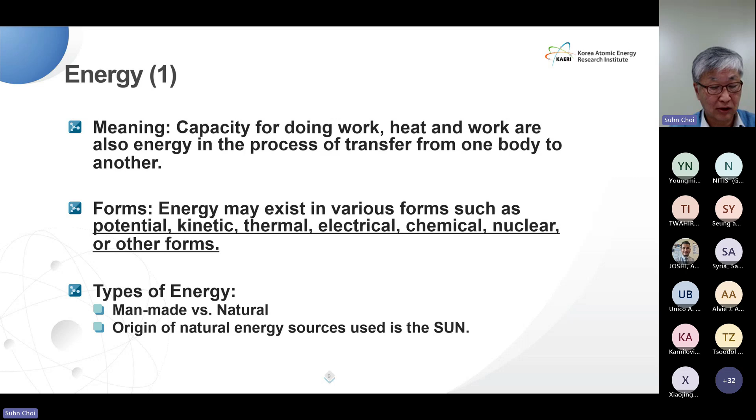Here's a concise breakdown of several energy sources: fossil energy, renewable energy, and nuclear energy. Each energy source has its unique characteristic and impact, and understanding this distinction is crucial for making informed decisions about sustainable energy use.

In recent time, various regions across the globe have been experiencing more frequent and severe weather events and natural disasters. The consensus among experts and specialists is that this surge in abnormality can be attributed to the excessive emission of greenhouse gases from the burning of fossil fuel. To overcome these challenges and ensure our survival, it has become imperative to transition towards sustainable and clean energy solutions.

Thus, we need sustainable clean energy to jump up the greenhouse gas hurdle. This slide underscores a critical point. The primary driver of climate change is closely tied to energy-related activities. A substantial 73.2% of greenhouse gas emission as of 2016 originated from the energy sector. This includes a broad spectrum of activity like power production, heat utilization, and transportation.

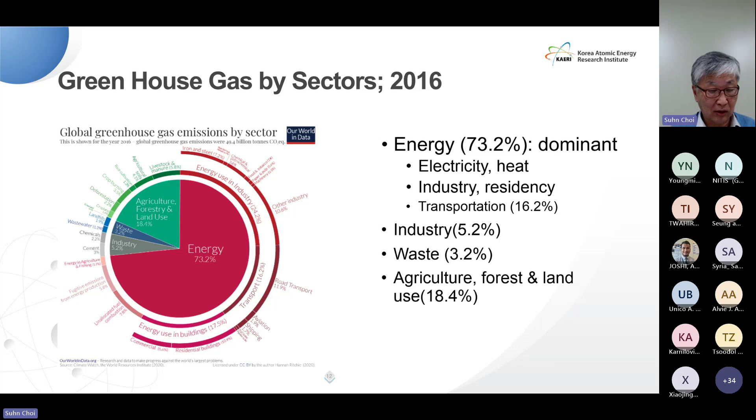Germany's energy mix provides valuable insight into the challenges associated with transitioning to renewable energy source. It emphasizes how Germany still relies significantly on non-renewable sources despite emphasized renewable energy. The combined proportion of gas, coal, and lignite exceeds that of renewable energy, standing at 45% compared to 44%.

This reliance on non-renewable sources is partly due to the intermittency of renewable energy. To compensate for the fluctuation of renewable energy production, backup sources like a coal plant are necessary for the consistent and reliable energy supply.

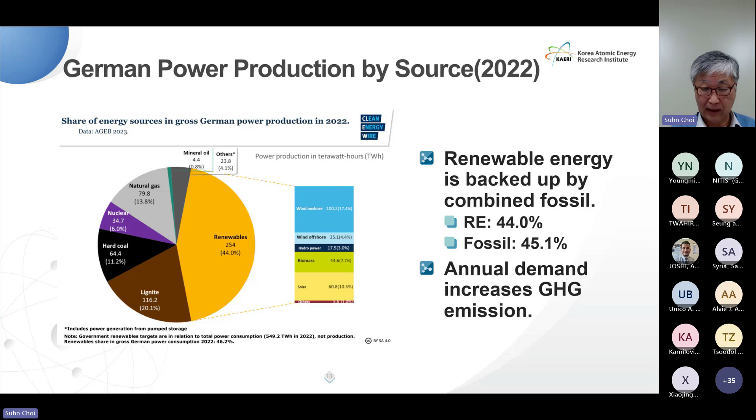Now let's see the characteristic of nuclear power and the classification of reactors. Understanding these characteristics and classification is essential for comprehending the diverse application and consideration in the fields of nuclear technology.

As you already know, there are two reactions to generate nuclear energy. Those are fission and fusion. Fission is an atom splitting phenomena, while fusion is an atom combining phenomena. Both produce amount of energy by E equals mc squared.

Nuclear fusion use lighter elements such as hydrogen and helium, which are in general more fusible, while the heavier elements such as uranium, thorium, and plutonium are more fissionable.

Let's delve into the unique characteristic of nuclear energy, considering both the positive aspect and the challenges it presents. While nuclear energy offers certain advantages in terms of low greenhouse gas emission and high energy density, addressing challenges related to radioactive waste, safety, economic viability, and proliferation risk is crucial for the sustainable and responsible use of nuclear power.

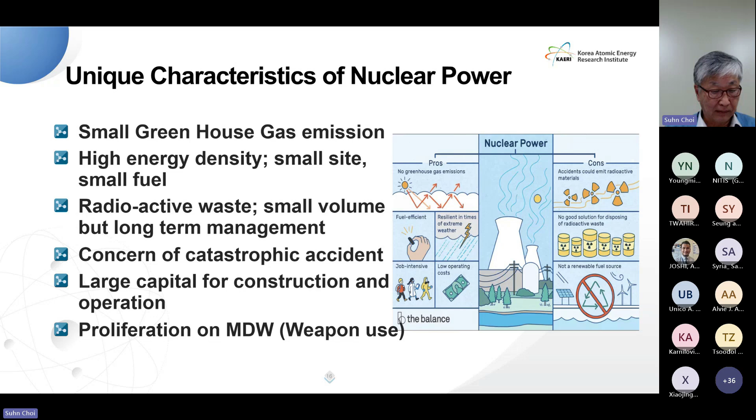Let's look at the characteristics some more. Absolutely, the high energy density of nuclear fuel is indeed incomparable to many other sources, making it a standout feature of nuclear energy. The energy ratio is a million times higher than the chemical reactions such as burning fossil fuels.

While the high energy density of nuclear fuel brings many advantages, it's important to manage the associated challenges, such as the safe handling and disposal of radioactive waste to ensure the overall sustainability and responsible use of nuclear energy.

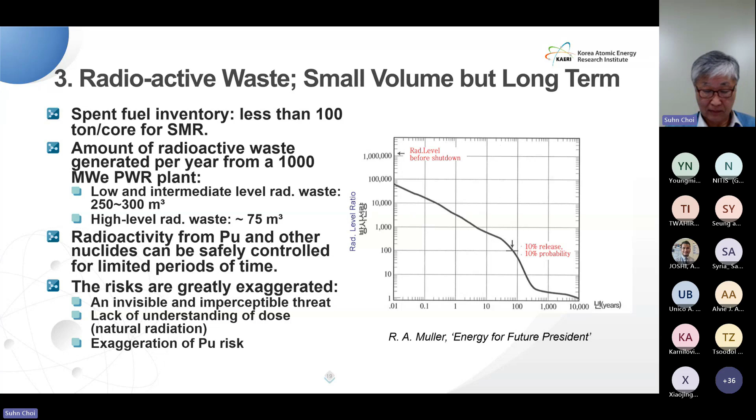According to Wiki, over the past 50 years, there have been 10 accidents rated at INES level 4 or higher, showcasing the relatively low frequency of serious nuclear incidents. In the 70 years since the development of nuclear power, the reported number of direct deaths due to nuclear accidents is less than 70 people. This emphasizes the effectiveness of safety measures and continuous efforts to improve reactor design.

The number of deaths from hazardous chemicals is highlighted as surpassing the number from nuclear accidents. While acknowledging that nuclear power plants are not risk-free, the statement emphasizes that they are not more dangerous than other accidents inherent to civilization.

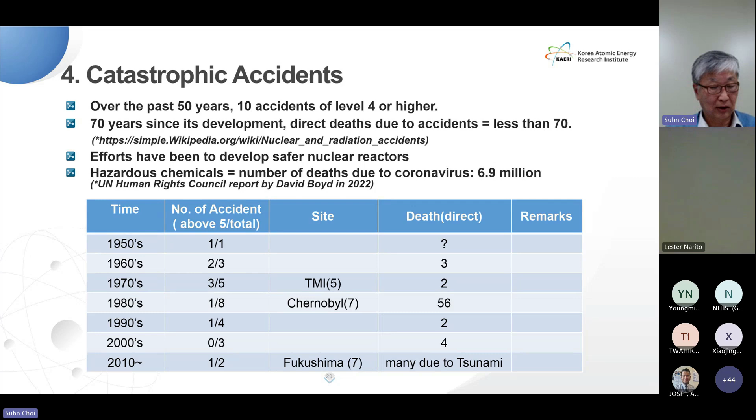A recent and substantial challenge in deploying large nuclear power plants appears to be of economic nature. Examining the table, the LCOE, levelized cost of electricity, for nuclear power is around $70 per megawatt hour, seemingly competitive with any other energy source, particularly renewables. However, the perception of nuclear power being expensive arises from the substantial total construction cost, a significant investment with a prolonged construction period of 7 to 10 years, inclusive of licensing permits.

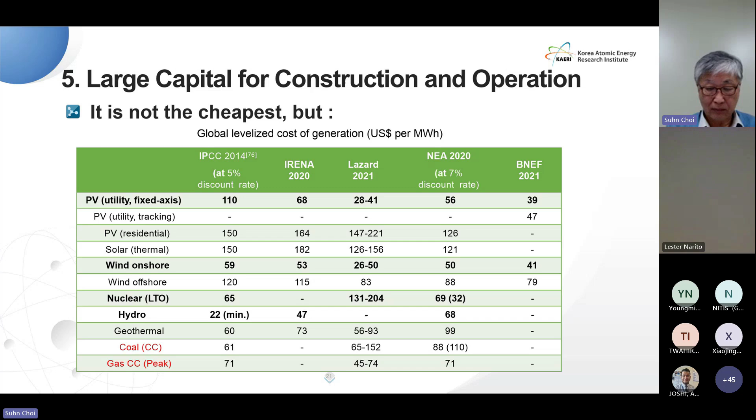Westinghouse's Vogtle power plant has had its construction period extended by 5 years, with the construction cost more than doubling. Framatome's Olkiluoto is showing a more than threefold increase in construction cost and a 13-year construction period extension.

However, this is not necessarily the case. The construction period and construction cost for the Barakah nuclear power plant, exported to the United Arab Emirates by KEPCO Korea, were the same as planned.

Since this uncertainty is large due to the large scale of business, the concept of SMR, a Gen 4 nuclear reactor, is being proposed as a way to utilize nuclear energy while avoiding this issue. However, the implementation of SMR is still in the developmental stage, necessitating verification through construction and operation.

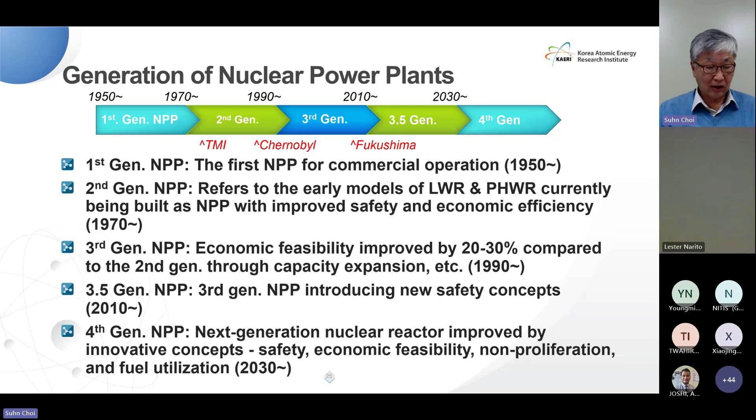There's another non-PWR plant reactor, the Gen 4, representing the fourth generation nuclear reactor, which deviates from the use of light water as a coolant or moderator. Indeed, it employs various coolant types, including sodium-cooled fast reactor, very high temperature reactor, gas-cooled fast reactor, molten salt reactor, supercritical water-cooled reactor, and lead-cooled fast reactor. Operating at elevated temperature, this aims to enhance efficiency and effectiveness utilizing metal, salt, or gas as a coolant.

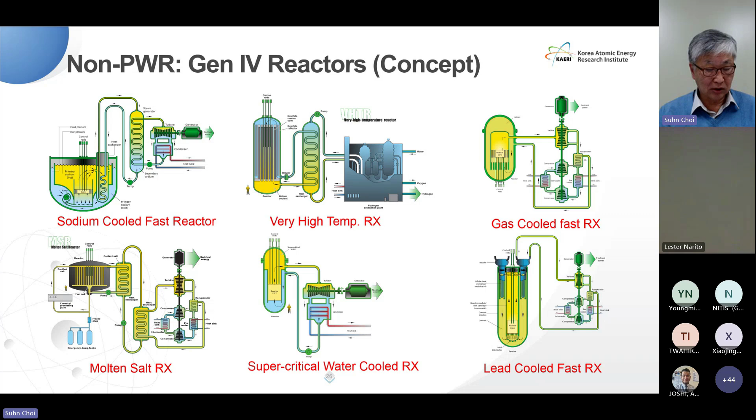In the mid-20th century, before the 3 Mile Island and Chernobyl accidents, nuclear power energy operated comfortably, maintaining its traditional advantage. However, the nuclear era witnessed a decline following these accidents. Now there is a pressing need to explore challenging new ways to address the global issue of climate change, leveraging innovative technology.

This is a prologue, end of prologue.

And now, from now on, let's take a closer look at SMR. SMR, Small Modular Reactor. Recently, you may hear this a lot if you have any interest in nuclear power. What is SMR? SMR stands for Small Modular Reactor. Small means physically a fraction of the size of a conventional nuclear power reactor, about 1/10. Modular means systems and components are factory assembled and transported as a unit to a location for installation. You can understand it when you recall a Lego block.

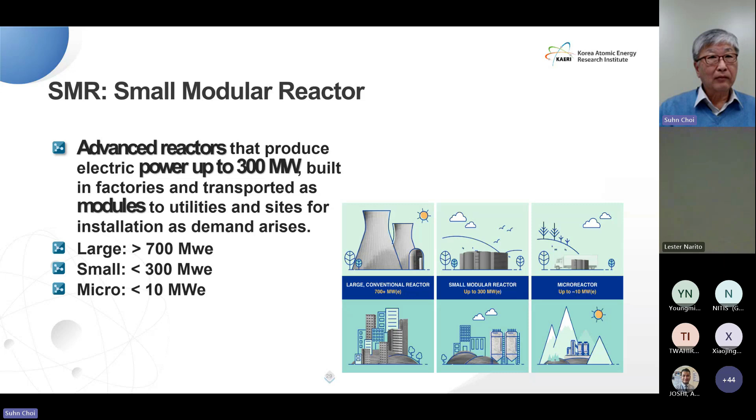The driving forces behind the development of small modular reactors include modularity and safety from passive safety systems and inherent safety features, and multiple application and robust siting which provide much flexibility. Remember the words modular, passive and simple safety system, and robust multiple application for SMR.

We are aware that SMR stands for Small Modular Reactor. Additionally, S stands for Simple, Speedy, and Safe in Technology. M stands for Manageable in Economy. And R stands for Resilient and Responsible in Climate Control.

From here, my colleague, Dr. An, will give you information on worldwide SMR development.

Hello, I'm the second speaker, Kwang-Yan An. Following Mr. Choi's lecture, I will introduce two chapters. The first chapter covers the current status of global SMR design, while the second discusses suggestions for R&D topics required for innovative SMR design.

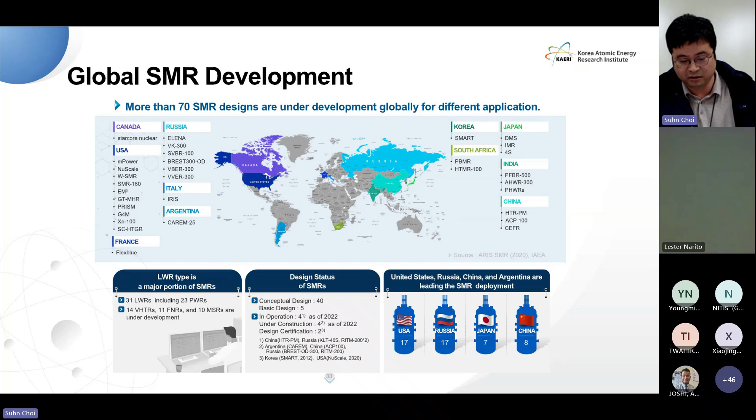And 2 SMRs in Korea and the United States have received design certification. One is the SMART in Korea, certified in 2012, and the other is the NuScale in the United States, certified in 2020. The other SMRs are currently in the conceptual or basic design phases.

Today, I'll briefly introduce some representative SMRs among the over 70 designs available. The first one is the NuScale nuclear power plant by NuScale Power Company in the USA, featuring a unique and innovative design in the field of nuclear energy. With an electric power of 60 megawatts, which is comparatively lower than the other SMRs, NuScale gains a strong advantage in compactness. Its smaller dimensions enable easy transportation by train, making it suitable for construction in inland areas.

This SMR is designed with an integral type, meaning all the major components, such as steam generator and pressurizer, are installed inside a single vessel. Notably, the reactor coolant system operates through natural circulation, eliminating the need for a reactor coolant pump. This SMR operates as a pressurized water reactor. Currently, the NuScale reactor is undergoing regulatory review by the US NRC.

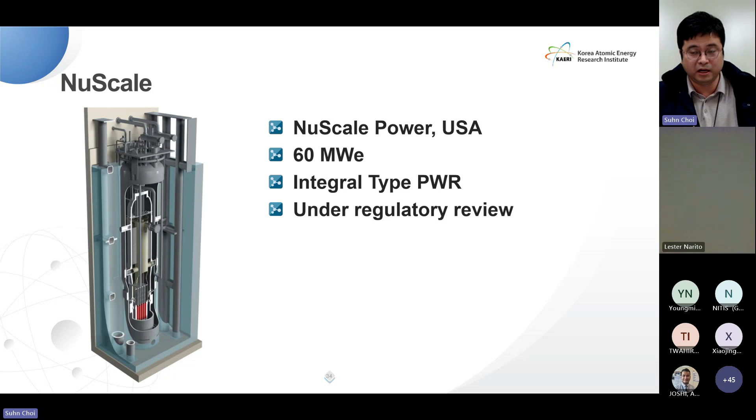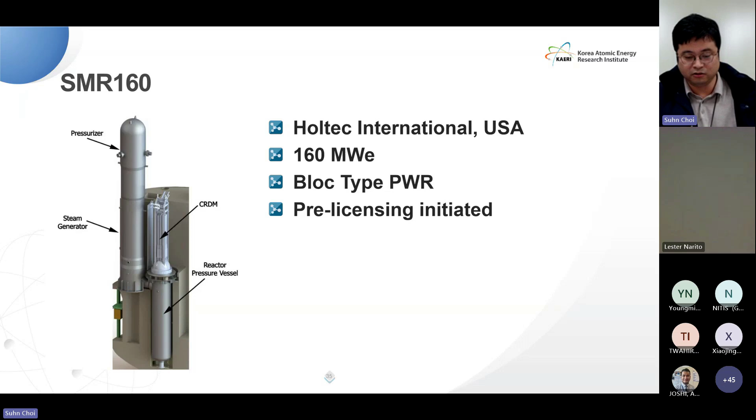The second one is SMR-160 by Holtec International in the United States, boasting an electric power of 160 megawatts. This is considerably larger compared to the NuScale power plant, leading to the adoption of a block-type reactor rather than an integral type. Unlike the integral type reactor, the block-type reactor separates and connects major components to the reactor vessel. As you can see in this figure, a steam generator and pressurizer are separated from the reactor vessel. Like the NuScale power plant, the reactor coolant system in this reactor operates through natural circulation, eliminating the need for a reactor coolant pump. This SMR operates as a pressurized water reactor. Currently, this reactor is undergoing pre-licensing review from the US NRC.

This is the NuWard by EDF Consortium in France, featuring an electric power of 170 megawatts for each reactor. The key concept revolves around flexible operation utilizing 2 independent 170 megawatt reactor modules. This reactor adopts an integral type, although it has large electric power, resulting in larger reactor and containment vessels compared to the NuScale design. During operation, this reactor is submerged in an underground cooling pool. Unlike the previous 2 reactors, the reactor coolant system in NuWard relies on forced circulation with a reactor coolant pump. This reactor operates as a pressurized water reactor. Currently, this reactor is in the conceptual design phase.

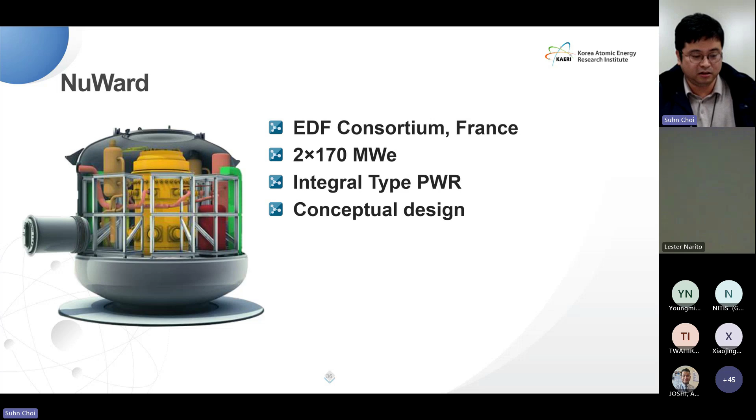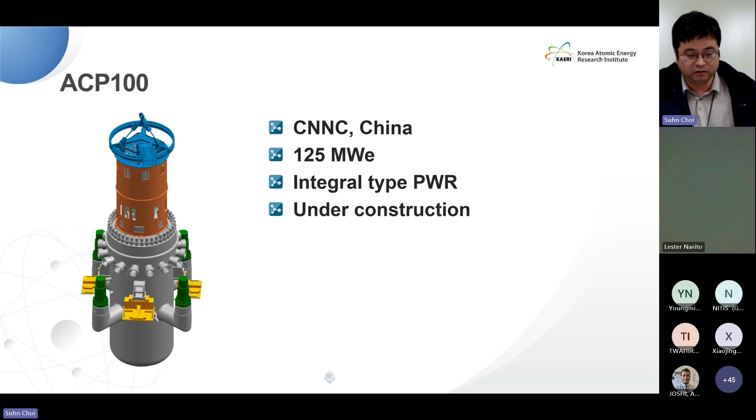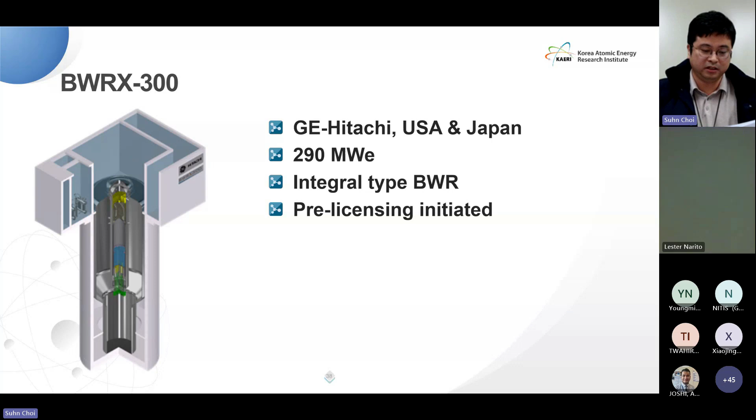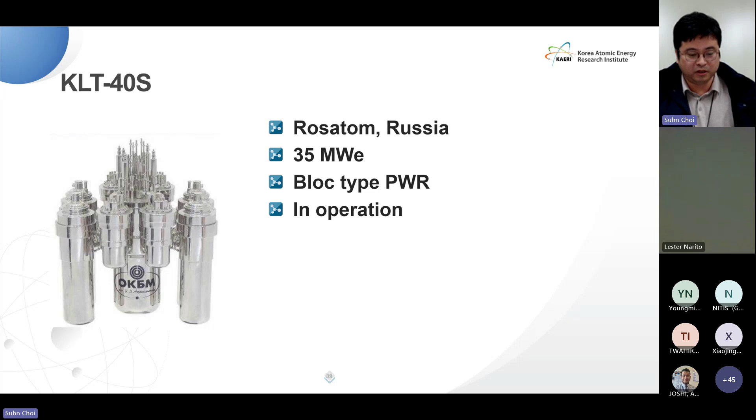It also finds applications in desalination and providing power for petroleum production. Manufactured in shipyard, the KLT-40S is assembled as a complete unit and transported to construction sites, minimizing on-site work. The steam generator and pressurizer are connected to the reactor vessel through nozzles. Notably, the KLT-40S has been utilized in the world's first floating nuclear power plant, which commenced operation in 2020. This SMR operates as a pressurized water reactor.

There are numerous other SMRs in various stages of development worldwide. As depicted in this slide, these SMRs can generally be categorized into two main types: integral and bloc. The integral type, exemplified by designs like NuScale, incorporates major components within a single vessel. On the other hand, bloc type SMRs such as the SMR-160 feature separate installation of components like steam generators and pressurizers. I think now you can distinguish the difference between integral and bloc types.

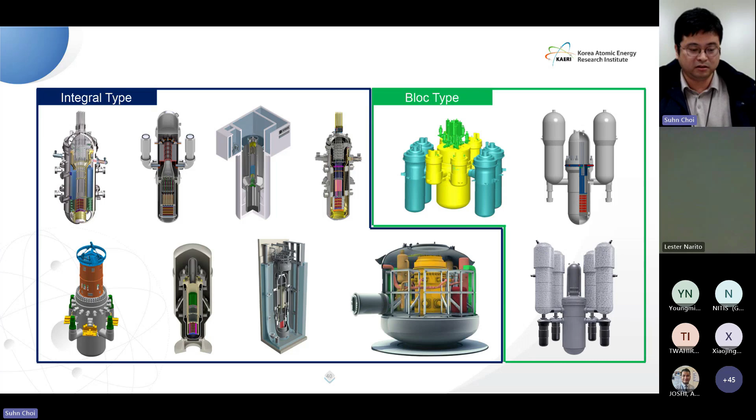The majority of currently developing SMRs today are adopting the integral type. Among them is integral pressurized water reactors in particular. Now let's delve into the integral pressurized water reactor in more detail.

An integral pressurized water reactor, called IPWR, is a type of nuclear reactor design where all major components, including the nuclear reactor core, steam generators, and primary coolant system, are housed within a single integrated pressure vessel. The primary coolant directly transfers its heat to the secondary coolant within the same pressure vessel, eliminating the need for a separated loop and reducing the number of components and potential leak paths. The close proximity of major components simplifies the design and enhances safety by reducing the risk of coolant loss accidents.

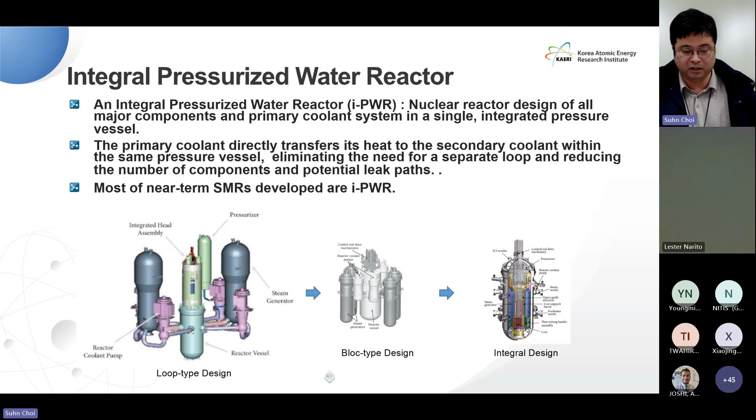Many observers have noted that the SMR design is integral with all significant primary components inside the same vessel. In fact, as you may already know, bloc type is also SMR if its electric power is lower than 300 megawatts.

The pressurizer in the primary system allows the reactor coolant to reach temperatures exceeding 300 degrees Celsius, maximizing heat transfer efficiency in the steam generator. The coolant in the secondary system transforms into steam in the steam generator by receiving heat from the primary system. This steam then operates the turbine, generating electricity.

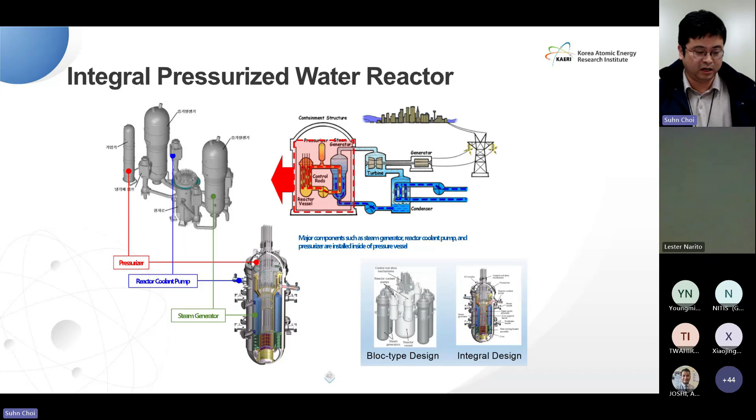IPWR has advantages and disadvantages. Advantages are enhanced safety, compact design and reduced footprint, simplified construction and operations, inherent stability, and improved thermal efficiency. Disadvantages are limited flexibility, higher maintenance challenges, complexity in manufacturing, potentially higher cost, and lack of operating experience.

Overall, the advantages and disadvantages of the IPWR design need to be carefully evaluated based on specific project requirements, regulatory considerations, and safety assessment. While the IPWR design offers significant safety benefits and potential advantages in certain applications, it is essential to weigh these against the potential challenges and costs associated with this relatively novel approach.

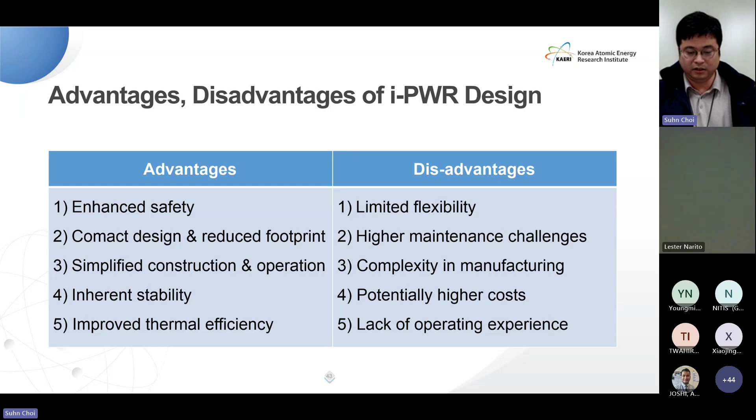From now on, I'd like to introduce the Korean SMR. However, before delving into that, let me provide a brief overview of the chronicles of Korean nuclear power development. Through this, you will gain an understanding of why Korea succeeded in its SMR development and was able to achieve the world's first design certification.

Korean nuclear power technology has progressed and achieved independence through several stages over the past 50 years. It was possible to achieve continuous development by simultaneously advancing technology and domestic construction.

From 1974 to 1981, Korea entered a stage of total dependence on foreign technology. The second stage, spanning from 1981 to 1995, marked a partial stage of technological independence using foreign technology. The third stage, covering the period from 1995 to 2009, marked the phase of technological independence. Finally, the fourth stage after 2009 is characterized as the stage where Korea has become a nuclear power plant exporter.

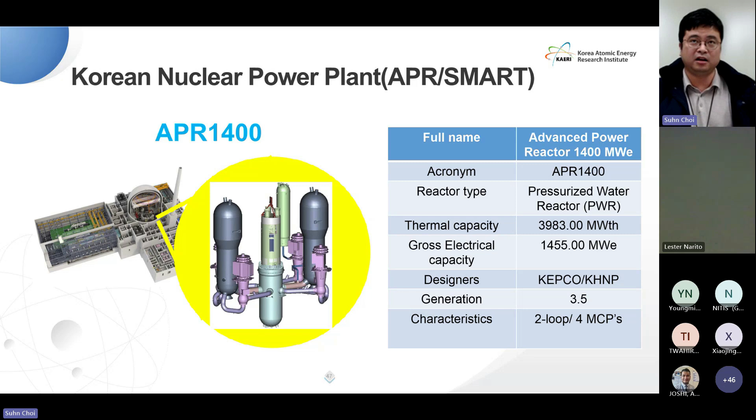Based on this accumulated nuclear power plant technology, we could develop the Korean SMR, the SMART. This is an integral type pressurized water reactor with electric power of 110 megawatts. It can also be utilized for desalination at a rate of 40,000 tons per day. It has a design life of 60 years, and it has received the world's first design certification from the Korean regulatory body.

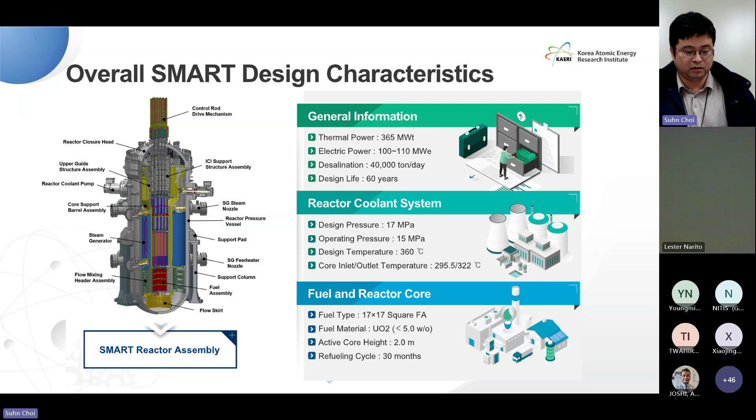The left figure shows the SMART. The reactor vessel has a diameter of 6 meters and height of 16 meters. All major components, including the steam generator, pressurizer, and reactor coolant pump, are installed inside the pressure vessel.

The conceptual design of the SMART began in 1997, and it received its first design certification in 2012. Currently, it is undergoing the process of receiving a second design certification for an improved design. It is expected to be completed by the end of this year.

Now, let's discuss what should be done to innovate the design of the SMR. Considering the SMR concept is not new and has not been commercially deployed for the last 20 years, there are challenges that need to be addressed for SMR deployment. These include, but are not limited to, licensing risk as a technical barrier, comparative economics as a commercial hurdle, and public perception regarding safety and spent fuel management.

Again, issues and challenges with respect to technology include licensing, because the SMR is a first-of-a-kind structure, system, and components, and non-light water reactor technologies. There are also operability and maintainability concerns, staffing for multi-module plants, supply chain for multi-modules, and advanced R&D needs. Non-technical issues include industrial, economics, and public security concerns. In order to promote the licensing and technical verification of SMR, especially iPWR, R&D needs should be met.

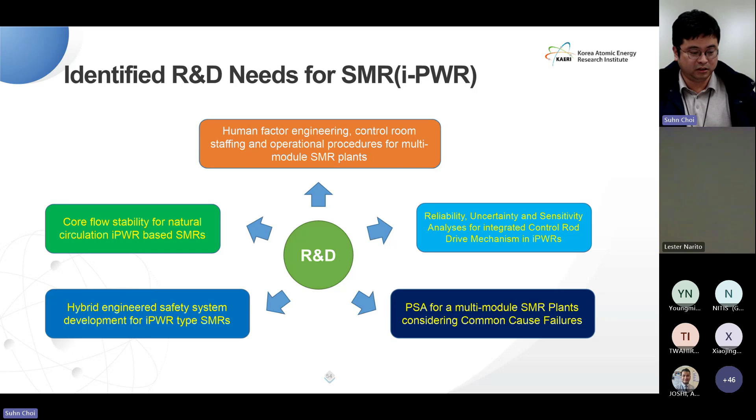To make SMR more competitive in the future, we want to apply advanced state-of-the-art technology to the SMR being developed. I suggest 8 innovative candidates.

The first technology that I suggest is 3D printing, also known as additive manufacturing. 3D printing is being adopted in the nuclear industry for its potential to introduce significant innovations for both currently operating and future nuclear plants. Here are some applications of 3D printing in the development of SMRs: it can enhance design flexibility, enable complex geometry, result in cost savings, facilitate rapid prototyping, and improve material strength.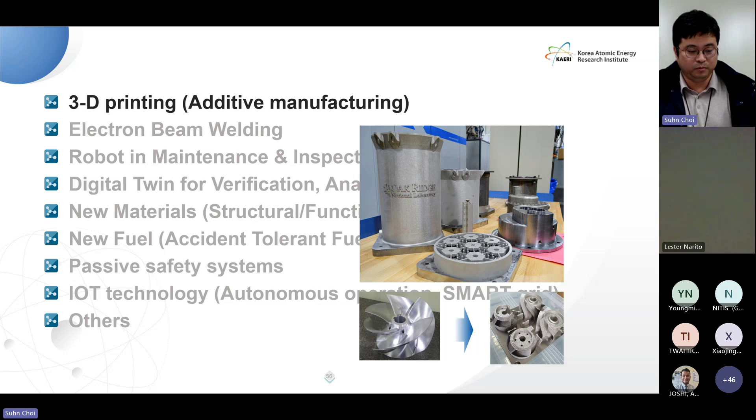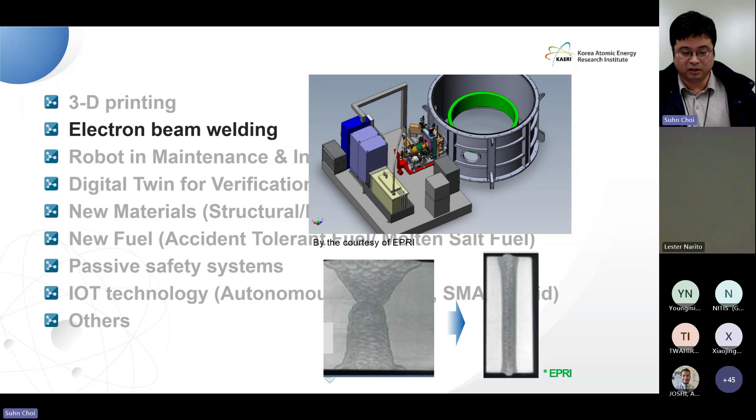And there is electron beam welding. Electron beam welding is a fusion welding process that uses a beam of high-velocity electrons to join materials together. The electron beam hits the materials and causes them to melt and flow together, forming a weld. Here are some applications of electron beam welding in the development of SMR. The advantages of EBW technology include rapid deployment, cost reduction, improved efficiency and quality of welding, as well as versatility.

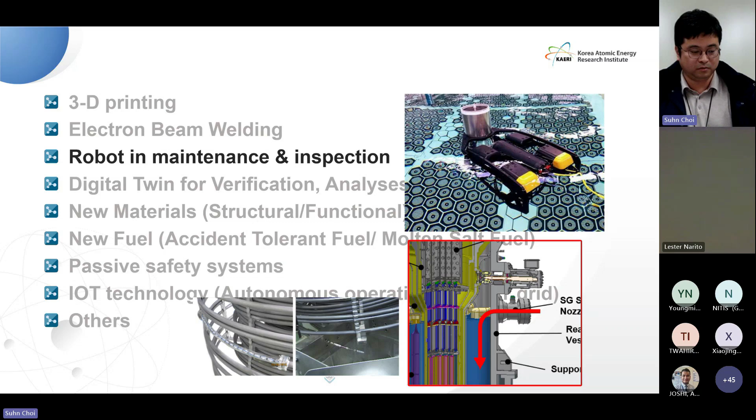Robots offer an excellent solution for maintenance and inspection in the nuclear industry. Their utilization is increasing, especially in the development and maintenance of SMRs. They provide efficient inspection and maintenance capabilities, remote operation, underwater tests, surface decontamination, health physics tests, and pre-programmed inspections. Furthermore, robots are undergoing development to meet the unique requirements of nuclear environments, including challenges such as radiation effects, remote maintenance, and deployment constraints.

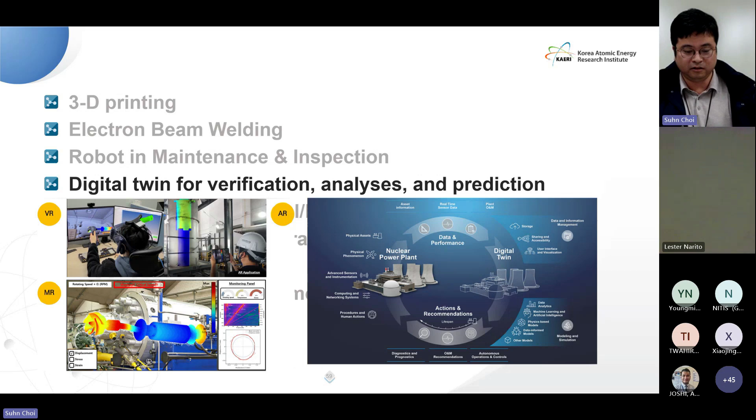The digital twin serves as a virtual representation of an entity, process, or system. In SMRs, digital twins find applications in predictive maintenance, information and communication, analysis and integration, control, modeling and simulation, and uncertainty quantification. In summary, digital twins hold the promise of significantly enhancing various capabilities in nuclear SMR development, encompassing information provision, communication, analysis, integration, control, modeling, simulation, and uncertainty quantification.

Furthermore, essential technologies that we need to prioritize include the development of new materials, innovative fuels, passive safety systems, and IoT technology. Okay, from now on, Mr. Choi will continue the remainder of this presentation.

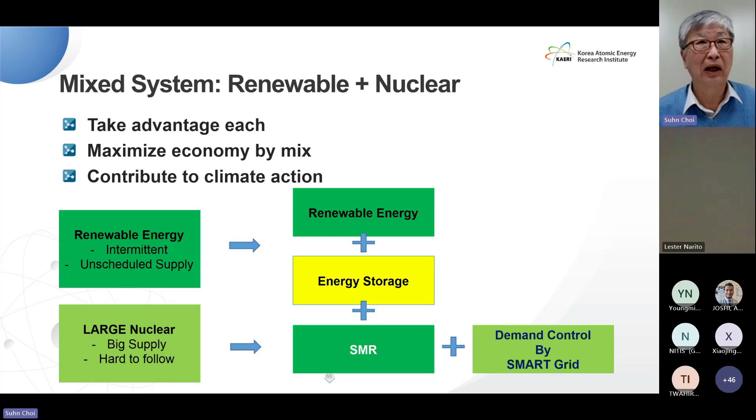Let's explore the concept of a hybrid system that combines nuclear and renewable energy, referred to as NRHES hybrid systems. With the integration of smart grid technology, we can effectively manage supply and demand. The NRE hybrid system should be optimized based on geographical position, climate conditions, and national economic factors.

Smart grid is also a brand new idea for the control of grid using IoT technology. It can effectively manage both the demand and supply of power within the grid by communicating with each component. This IoT application enables optimized management and makes it feasible to create hybrid combined energy systems that manage flexible power supply.

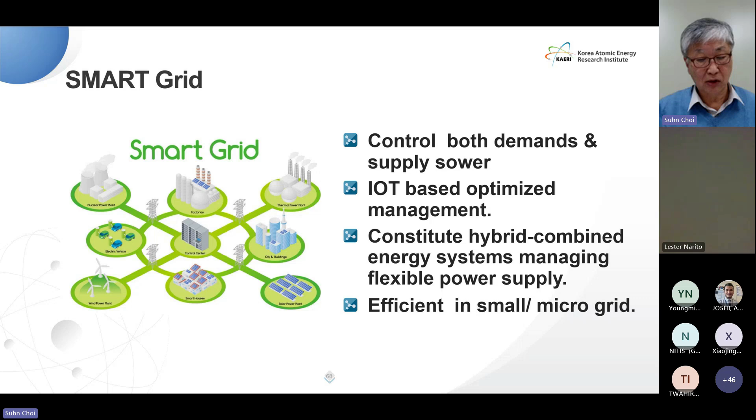Smart grid technology proves to be highly efficient, particularly in small microgrid settings. Achieving energy use efficiency can be realized through the diversification of utilization methods and application areas.

Beyond electricity production, considerations for thermal usage in industrial heat and district heating, desalination, hydrogen production for various transportation, and provision of propulsion power should be explored. This approach not only contributes to addressing climate change, but also expands economic feasibility and market opportunities.

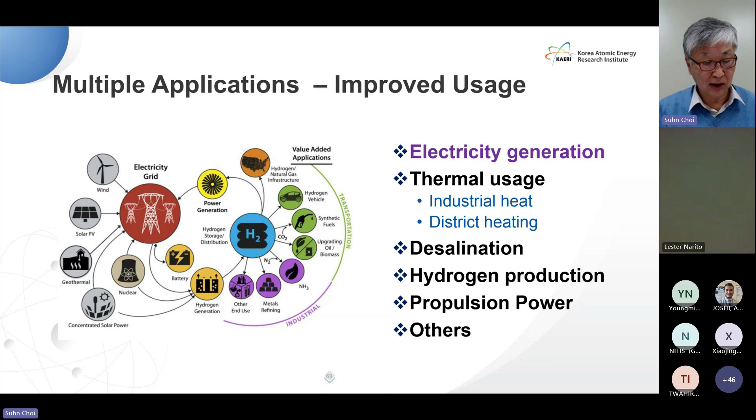Reflecting on the global SMR development landscape, out of approximately 70 developing new SMRs, there aren't many from Asia. However, several Asian countries are actively pursuing energy independence and economic growth through the adoption of SMR. Notable Asian countries in the world SMR development status include Korea, China, and Japan.

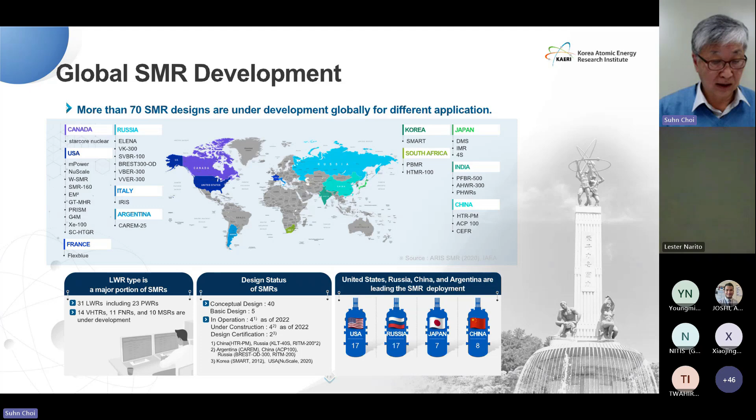There are archipelago countries in Southeast Asia with isolated populated areas and limited grids that may need distributed generation, which is suitable for SMR deployment. So, for Asian countries with small grids and without natural gas, SMR could be a viable option.

In considering the deployment of SMR in Asia, the following top-tier requirements should be prioritized: number one, low carbon energy; number two, advanced safety features; number three, modularized small-scale generation capacity; number four, energy security and independence.